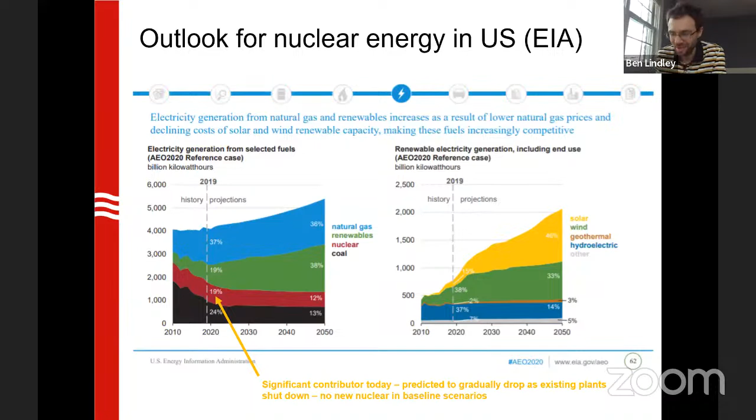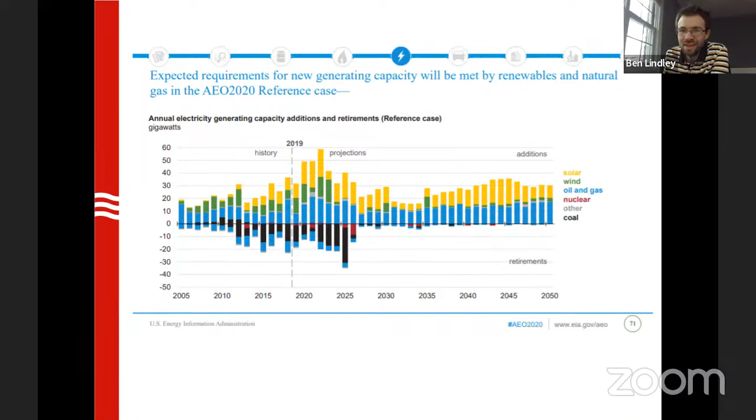One thing you need to bear in mind is that electricity is only one component of our energy use. We also use a significant amount of energy industrially, so that's industrial heat, transportation, your cars, planes, etc. And residential and commercial heating are also non-trivial.

This is important if we start caring about things like carbon dioxide emissions and also our wider energy mix, because even if we decarbonize electricity to some degree, we could end up affecting very little else. And even if we started to deploy electric vehicles at scale, that still leaves heating as well.

I should mention, I very much approach this problem as that we should decarbonize the planet, otherwise future generations are in serious trouble. And I know that's not a settled position in the US. When I ask my class this, when I give presentations in rural Wisconsin on this, I find that about half of people really care about climate change and the other half do not. I'm in the care category on climate change. I appreciate you might not be.

But the other reason for doing this, or the other reason we might care about this, is energy security. And most people can get behind the idea that we want to have energy security. That broadly means we want to generate domestic energy, and that would also mean we want to reduce reliance on fossil fuels, of which we import quite a lot.

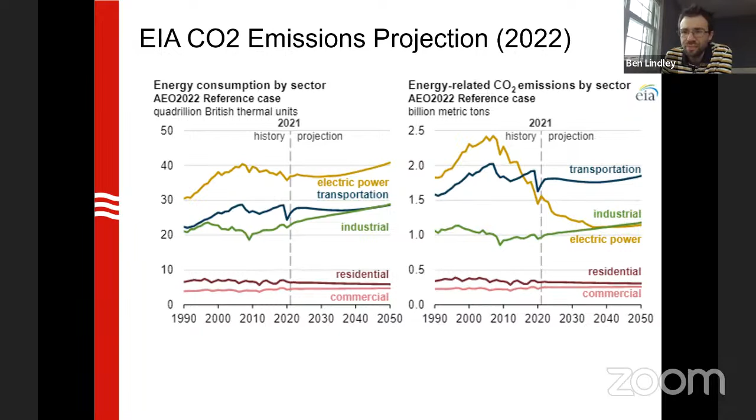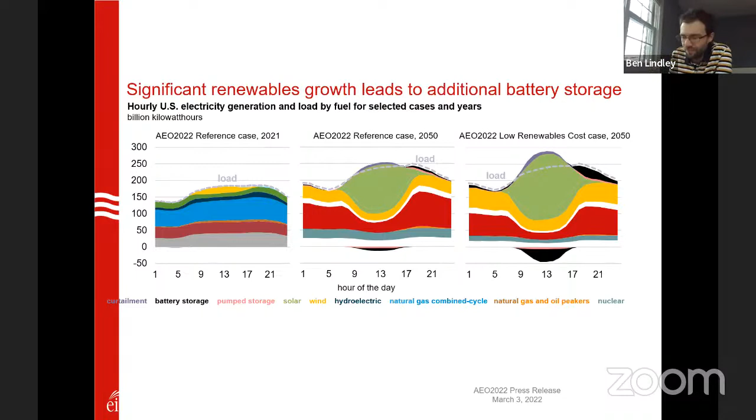That sort of dips net demand for everything else, so generators that can choose whether or not they generate drop to quite low levels. Now, later in the day, especially in places with large use of AC, solar power comes offline, AC cranks up late afternoon when it's the hottest part of the day, and you end up with this big peak in demand around 5 o'clock. I'll come on to that a bit more in a minute.

And just to summarize then, so this sort of do-nothing scenario: no changes in policy, no changes in nuclear costs, no new nuclear construction, no reductions in CO2 emissions from the United States out to 2050, little electrification of transport or heating, and continued construction of fossil fuel plants.

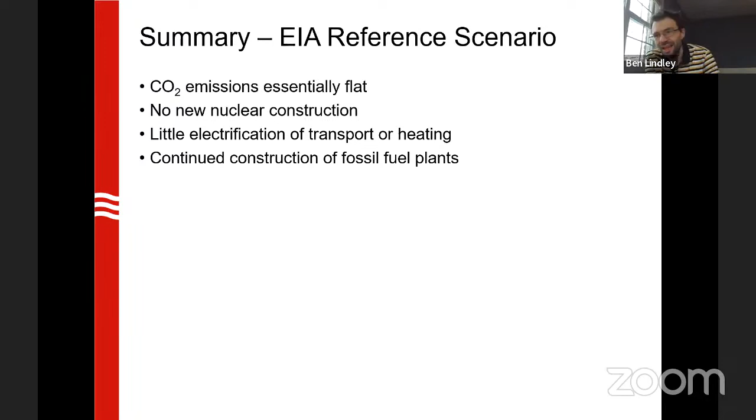And the central issue of nuclear power is capital cost. So the nuclear plants, you need to build them, then you need to pay people to staff them, and then you need to put fuel in them, and then you need to decommission them and deal with the waste.

Uranium is essentially free for all intents and purposes. Operations and maintenance is significant - you do need quite a lot of staff to run a nuclear plant, more than you need for a gas plant. That's especially true of our current reactors as they're aging - they're 30 to 40 years old in many cases. So that means you need to maintain everything.

One sort of misconception is the idea that decommissioning and disposal costs are large. Now, they are large in absolute terms - people throw numbers around like $100 billion for US management of waste. But if you look at $100 billion compared to 20% of your electricity for 60 years, it's not actually very high. On top of this, discounting effects mean it doesn't really affect the cost of new nuclear construction, because you build a new reactor, and in 70 years' time you need to decommission it. Inflation-style effects mean that cost barely makes a tick when you're trying to decide whether you build your plant.

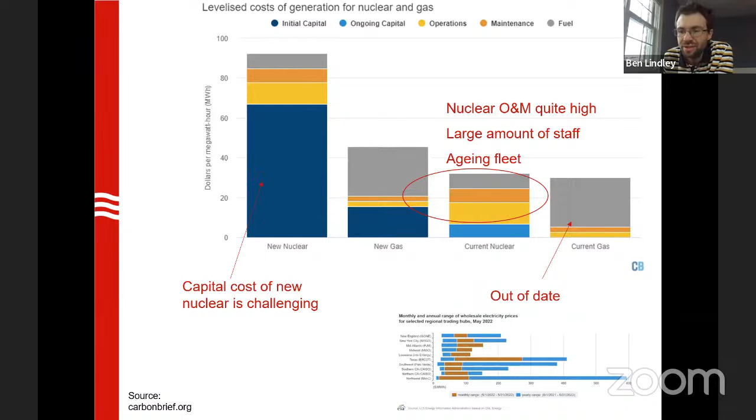That's the two bars on the right here, where current nuclear is a little bit more expensive than gas. Even though the fuel for nuclear is cheap, what it really came down to is operations and maintenance costs, which are higher than gas. So up until about a year ago, nuclear plants were being shut down in some cases for economic reasons, because even having already built the plant, they could not compete with gas, which was so cheap. The amount they couldn't compete by wasn't very high, about $12 a megawatt hour, so on the order of 20% of the cost of electricity. But that was enough to mean plants were closing.

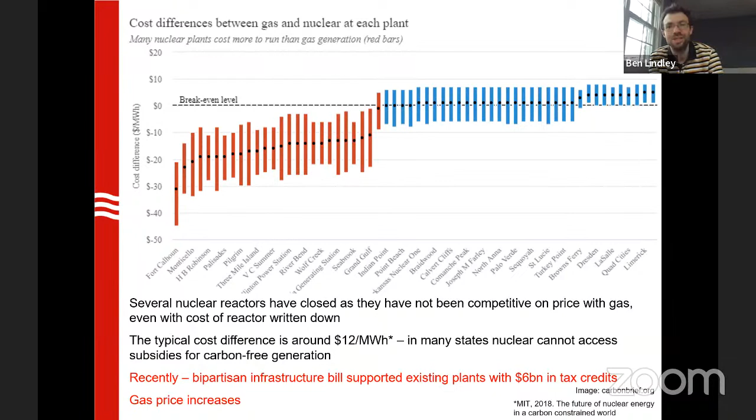Now the picture has radically changed for existing plants over the past year. First, the bipartisan infrastructure bill introduced tax credits for nuclear power, enough to bring them back to being competitive. Second, gas prices have increased. Third, people really care about energy security in light of geopolitical events. So now, for example, our local utility, Constellation Power in Illinois, is talking about how to get more power out of our reactors, not about shutting them down. Big change.

There's also been some state policies. New York, Illinois, and New Jersey in particular have subsidized nuclear power for some time, some of those based on the social cost of carbon. The picture for different states is important too. States like California, much of New England, and Minnesota have moratoriums on new construction, so there's a ban on building new nuclear plants. Minnesota's talked about lifting this ban on and off over the last few years, but to some extent it's been moot because there hasn't been much economic drive to build reactors.

Dr. Lindley? Yes, I have a question. This is Tony Praza. The question is associated with the social cost of carbon. If we look at what happens when we have a gas plant continuing to burn, it's a lot more efficient than coal and has a lot less impact environmentally. But the methane that escapes causes serious problems over the next short term, and then what changes into CO2 when you burn that natural gas, the social cost of carbon and the number of people impacted around the world as we burn fossil fuels, that sure seems like it should be a major factor taken into consideration. And it isn't, other than I think Europe is doing a little bit better job of it.

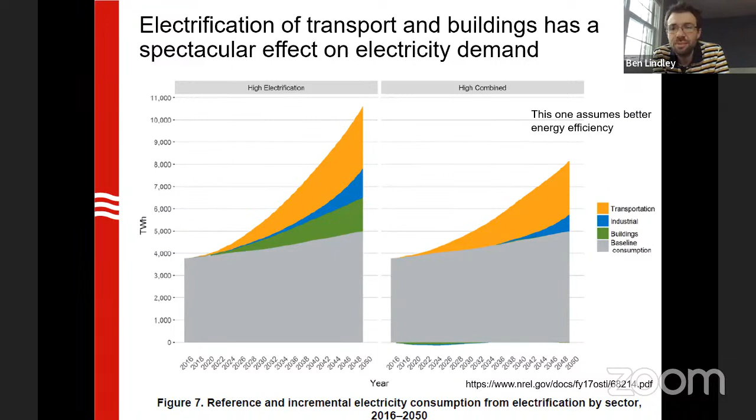So there's a couple of scenarios shown here, from the National Renewable Energy Laboratory. These studies look at how you'd get lower carbon dioxide emissions, and what those scenarios would look like. The scenarios I showed on the previous plot were these yellow dashed lines down towards the bottom of my slide, which is also fairly consistent with the carbon reduction target the Obama administration had.

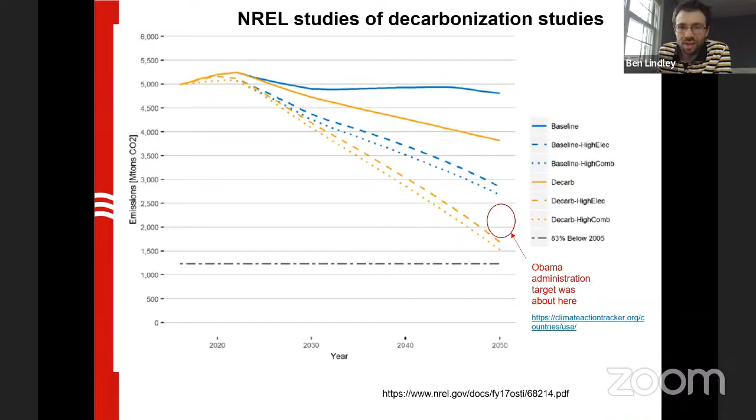Where we're going with carbon emissions at the moment in the US is flat. Various decarbonization scenarios can drive this down. In NREL's scenario, they did not consider nuclear power. They were looking at high penetration of renewables. That's their remit, that's fine.

And if they really wanted high decarbonization, the bottom of those two lines I showed, they said take out the natural gas and put in natural gas with carbon capture and storage. So for NREL's scenarios of deep decarbonization, they're saying do loads and loads of variable renewables.

To be clear, variable renewables are great. They've come down in price, they're clean, they're domestic, they're fantastic. It's about what we do with the rest of the power source. And what they have at the bottom is something coming from gas, potentially with carbon capture and storage.

Now, another way of doing this, from a think tank, gives very similar results to NREL. Where I got these bigger plots was all the variable renewables they wanted to put in. And at the bottom, this was a scenario that had an expansion of nuclear, instead of using carbon capture and storage.

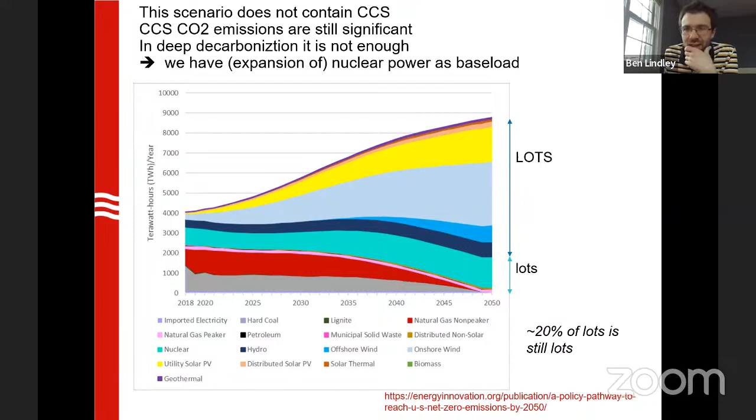That's building 100 new nuclear plants, many of them at one site maybe, but a lot. And at the moment, we're not there. The problem is cost.

This is seen as a reputable, unbiased source on costs of various electricity supplies. I think this is 2020, so it might be a tad out of date, but it's not far off. A few things I want to point out here.

Solar PV is here, so $40 a megawatt. Now, this isn't including all the generation costs. As Richard mentioned, distribution, transmission, backups, all of those issues aren't included. So this really, really cheap number for renewables gets quoted a lot, but it's not the big picture.

The big picture is shifted up by this red arrow, putting us maybe somewhere around here. That's if renewables were completely paying their way, generating power at $40 a megawatt but accounting for when and where it's generated, and the cost associated with transmission systems and so on. But it's still cheaper than new nuclear, which according to this Lazard source is all the way up here, $118 to $192 a megawatt. I'll address why that is soon.

Existing nuclear power stations are down here. Coal is here, the top end of coal being carbon capture and storage. And wind is similar to solar, with offshore wind a little higher.

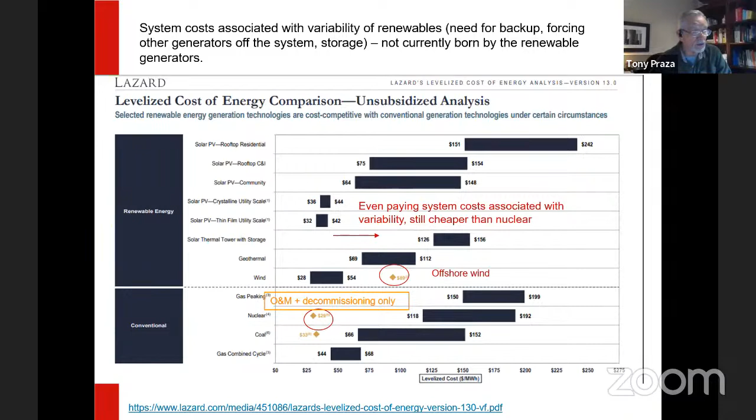Absolutely, Tony. Can I say one thing? This is Lou. But the problem with solar storage, it's not generating. It doesn't generate anything. It stores, and it does get the EIA graphs bring it in, but you got to be careful. It's not bringing really new energy in. That's all I want to say. Sorry for the interruption.

Thank you, Lou. I absolutely agree. And in terms of trying to put some numbers on these costs, there's a study here that estimates the cost. Now, I'll declare this study comes from the nuclear industry. So it comes from an organization called the Nuclear Energy Agency, which is a sort of international research agency based in Paris. So they're reputable, but of course they like nuclear power.

Having said this, what they project is that system costs might be $10 to $20 per megawatt hour, sort of at current penetrations, which is enough to shift those lines up. If you start going up to 3/4 of your electricity supply, then it becomes more like $40, $50 a megawatt hour. And so that's more than double the current cost, essentially. And if you add those system costs onto the cost of the variable renewables, then that becomes of the order of $100 a megawatt hour in, say, 2020 economics.

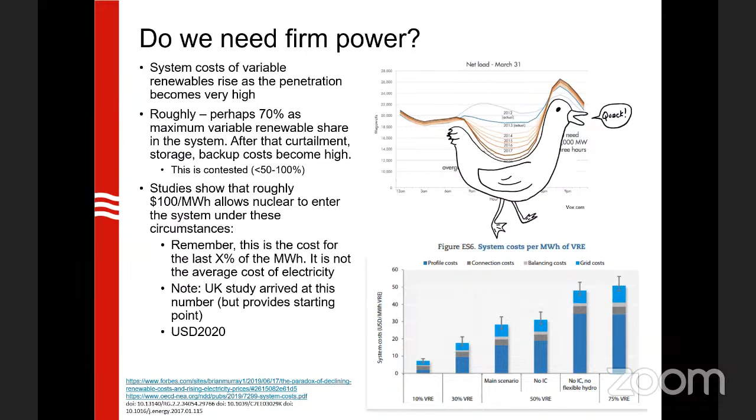So I'll comment as a sort of educated bystander. I'm not an expert on it, but I can make a couple of comments. I think some of the NREL studies suggested that demand management with, say, car batteries can help flatten demand. And I think some of the studies I'm quoting here, so these numbers like this $100 a megawatt hour, I think some of them factored in demand management into those numbers.

I guess the final big picture point I'll make is that seasonality is quite difficult to cope with this way, right? We can move demand around in the day, but moving demand between summer and winter, which is the sort of thing we start worrying about if we have lots of solar power, becomes harder. So sorry, and that's not a complete answer, but it's all I know.

I'd like to ask another question, and that is I don't see anywhere here the fact that renewables, particularly wind and solar, need to be replaced about 3 to 4 times more often than nuclear plants. And they've done some studies. A Finnish website, Thoughtscapism, using Sweden and Korea as examples, have shown that when you take the duration of the equipment into account, it doesn't look nearly as bad. Nuclear, that is, doesn't look nearly as bad compared to the other sources of energy.

So could I ask Richard on that? How do they deal with discounting effects in that? Because with all of these projects, after 20 years, discounting sort of done. But obviously, having something that lasts 3 times as long is great. There's a good argument that discount rates aren't a very sustainable way of looking at the world. But I just want to oppose it to economics.

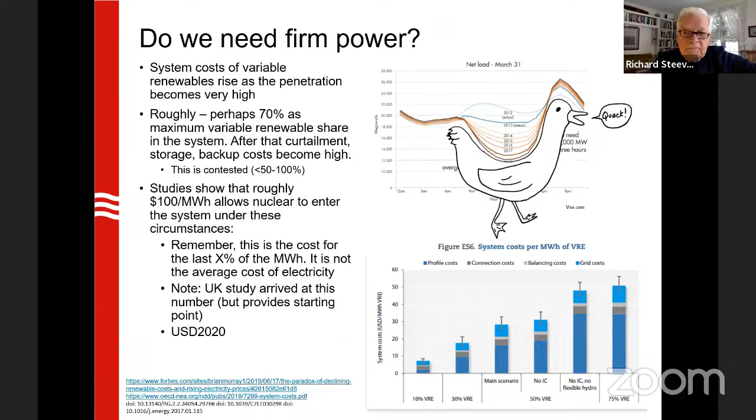Well, I'm not sure about that, but nuclear does have its decommissioning cost built in up front, whereas that has not happened with the other sources of energy. So, but I'm not sure about that. I'll send you the link to the Thoughtscapism one if you haven't seen it. I think it's worth bringing into account, but most people don't. Okay, thank you, Richard. I'd be interested to read that. That'd be great. Okay. Yeah.

Moving on from variable renewables, the question becomes what nuclear is competing with to supply the piece of the energy puzzle that isn't variable renewables.

Going back to the plot I had up a couple of slides ago, it's quite difficult for nuclear to compete with gas, at least before the Ukraine war. How the Ukraine war changes this picture, I haven't seen up-to-date data on. The problem for nuclear is gas is down here, or was pre-Ukraine. Coal is a bit more expensive, and also very bad for the environment. Once you start looking at carbon capture storage, these costs start shifting upwards.

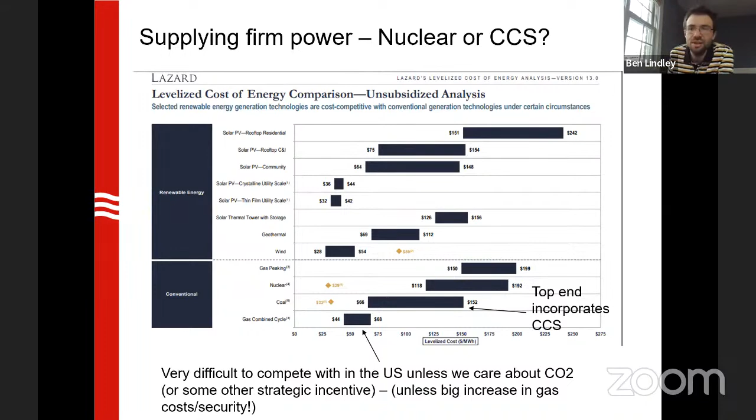So the argument for nuclear gets tied to how much we care about strategic considerations - energy storage, energy security, climate change and the environment - rather than being a straight economic thing, because in the US it is difficult to compete with gas. This isn't the case in other countries. In Europe, gas is expensive enough that nuclear, even quite expensive nuclear, can compete with gas. Here it's different. Carbon capture and storage increases the costs associated with fossil fuel generation.

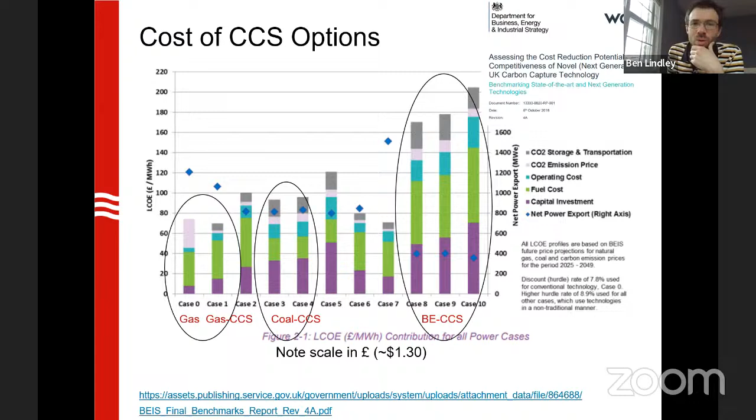We'll move on from that. Now I'm going to get to the thing you actually asked me to talk about, which is nuclear costs. I've set a number and said I want nuclear power to be under $100 a megawatt hour in 2020 money in order to be competitive.

When we think about the cost of constructing a reactor, which is the big thing we need to worry about, we think about it in dollars per kilowatt electric of the reactor capacity. I can't remember the exact number, but I think to get to $100 a megawatt hour we need to be somewhere around the $6,000 per kilowatt mark for nuclear power.

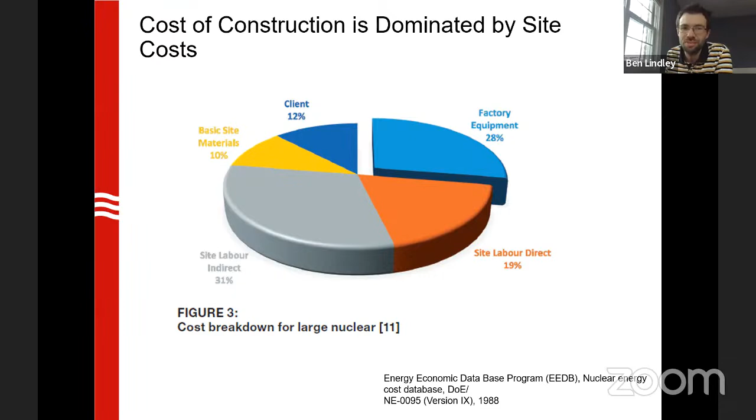Now the cost of a nuclear reactor is dominated by building the reactor. The cost of building the reactor is dominated by site labor. It is all about having people in hard hats and high-vis jackets on a site, pouring concrete, laying rebar, all of that stuff for years and years and years. It is not the cost of building things in the factory and shipping them to site - manufactured components are low. It is about doing things on site, along with interest rates and financing.

So nuclear reactors, you have to have lots and lots of site labor for a long period of time. Site labor is expensive, interest is expensive, and that is what drives the cost of these reactors.

I mentioned before that the projects have become bigger, and that's made them more complicated, so they take longer and cost more.

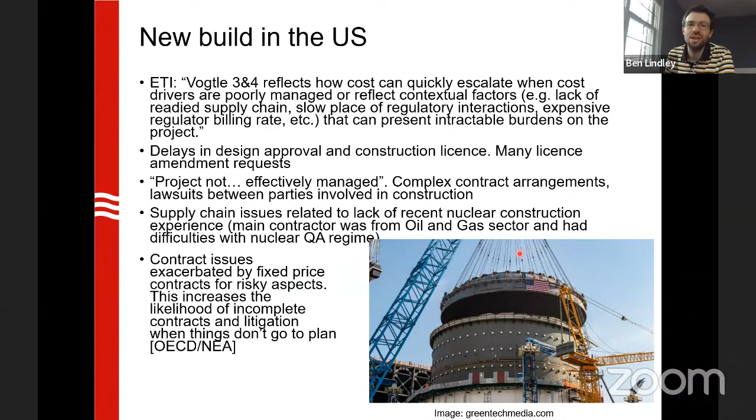Now, contrast that with what went on in Asia: you build one project, then go build the next reactor, then the next. That means the supply chain is capable of supplying all the components, and the people building the reactors are experienced, so they know how to do it properly. The same consortium and workers work on multiple projects, giving economy of scale from doing the same thing repeatedly. There was also effective management to ensure that wherever things could be made cheaper, that was learned — a focus on efficiency and savings.

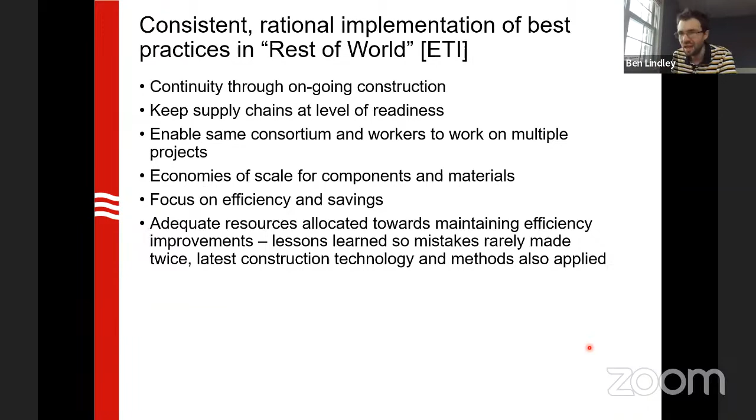One of the big factors — and this may sound silly — was how complete the design of a reactor was before they started building it. On this chart, the x-axis shows how complete the design was at the start of construction, and the y-axis shows how much the reactor cost to build.

This clump here is the Asian reactors from Japan, Korea, China, and the UAE. This one is Vogtle — the reactor they started building in the US — they had completed only 30% of the design when they started building it. The reason for that is you don't finish designing the plant until there's a decision to invest in the site, because designing the plant is expensive. So you get an investment decision — right, we want to build this — and then the decision is taken to get it up and running in eight years.

So that means construction needs to start next year, and they'll build the bits they know how to do, designing the rest later. This was disastrous because things changed — they didn't have a complete design. The regulator made them redo things; they'd start building on site, find it didn't work, and have to rework it. That meant everything became expensive.

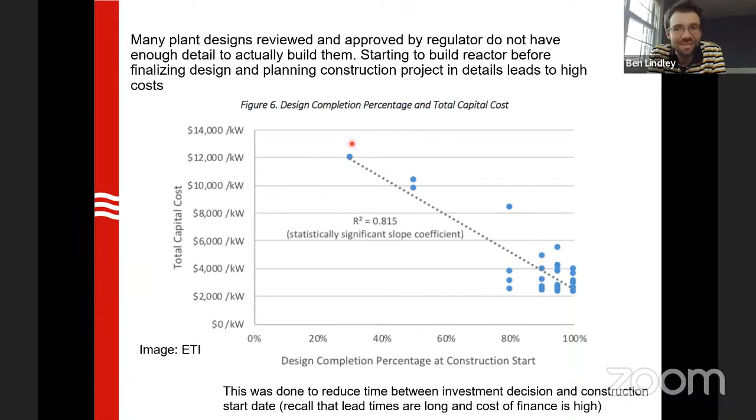However, this one, Vogtle, is what we call a Gen 3 plus reactor, which means it's got even more passive safety. So it's a slightly more passive, advanced design than some of the domestic Chinese designs, for example. One factor, though, that's quite telling is - where did I get this...

These reactors built in France and Finland are French-designed reactors. This one is an American-designed reactor called an AP1000. These two French reactors are called EPR. EPRs and AP1000s have been built in China at competitive costs - the same fundamental design was taken to China for both of these, and the cost was a lot lower than when it was done in the US.

Sorry, that was a very long answer to your question. I hope that covered it. Yes, it did. Yeah, thanks.

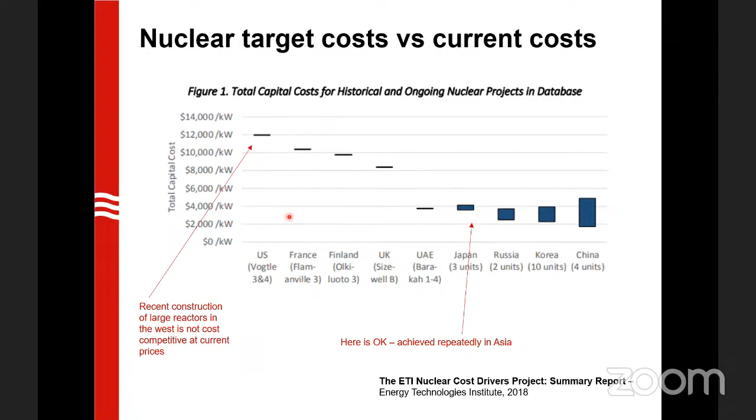The way we're going with this in the US, and to a lesser extent Europe. The difference between the US and Europe is that in the US, the energy system is not the responsibility of the federal government, it's the responsibility of state governments, and most things are privatized. This means utilities are small and things have to be broadly privately funded, although with some government support.

In Europe, the picture's a bit more blended. The state will directly finance reactors. In France and Britain, the state can come along and say these big reactors are getting too big for the private sector, we will do it, or we will work with you.

But both in Europe and the US, there's a move towards smaller reactors. The idea is to go down from like 1.5 gigawatt electric to something between 50 and 400 megawatt electric. This reduces the costs and makes the project easier to finance. If you have a smaller reactor, it takes less money to build, so you can build it without betting the company on it. The idea is to get these things down to like $1 billion or so.

The second thing to do is try and get the unit cost acceptable, and two principles are used here. One is modularity, where you build the reactor like a nuclear flat pack, with a whole load of components built in a factory. We're good at building things in factories—they're efficient, costs stay down, productivity is high, and we're not paying for workers to relocate to some site 1,000 miles from their family. We can optimize in factories, then ship everything to site and just assemble it.

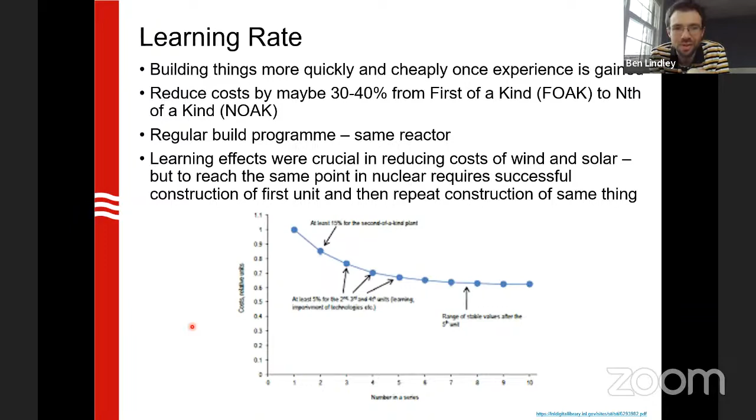You can do these things with large reactors, and if done well, large reactors can be cost effective. In the West, this requires a lot of state intervention, and even in Europe we don't really have the level of state intervention to do this effectively. It's not build one reactor, it's build 10 reactors—building 10 large reactors is $100 billion, and no one in the West can finance that, including Europe. So the logic is: make your reactor small, then I can finance it, then I can build lots of them, and then it can be competitive.

For either of these approaches, we can hit target costs in the sort of $80 to $100 per megawatt hour region, which according to the target numbers I put up earlier is well within where I think a nuclear program can get and be cost effective.

The leading example of this in America is called NuScale—a reactor developer headquartered in Oregon. They're interesting to us Wisconsinites because they signed an MOU with Dairyland Power to evaluate the potential of their technology in Wisconsin. The idea is they'll build up to 20 factory-built reactors, stick them on a truck, build something that looks like a big swimming pool at the other end, and put those reactors in the swimming pool.

Their stated target cost was $65 a megawatt hour in 2020 USD. It will have gone up since then because commodity prices have gone up, and the cost of everything's gone up. Notably, this is even less than the figure I had on the previous slide—I said 80 to 100, they're saying we can do it for 65.

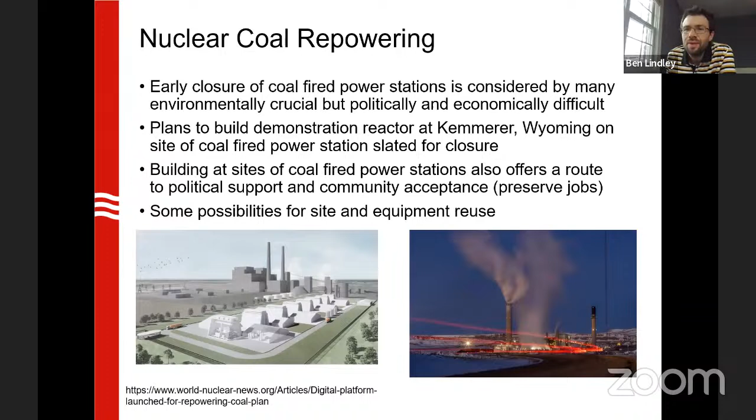There's a pilot plan for this at a site called Kemmerer in Wyoming, a coal-fired power station that's due to close. The plan would be to take one of these new advanced nuclear reactor designs and put it on the same site. I think they're working with local stakeholders in Wyoming to try and make this happen, and there's a degree of positivity behind it.

Another area is process heat from nuclear power. I mentioned way back that most of our energy use is not electricity. One route to decarbonizing non-electricity production is electrification. This is probably the route we're going down with electric cars one way or another—it might take 50 years, but that's probably where we're heading. With industrial heat, which is a major user of energy, it's quite difficult to decarbonize efficiently.

We could produce electricity and then use an induction heater, but that's really inefficient, so it would be expensive. Nuclear plants produce heat directly. We normally convert that heat to electricity using a turbine, but we don't have to—we could use that heat directly to heat industrial processes if we co-site a nuclear reactor with an industrial facility. This gets a bit easier if the nuclear plant doesn't have big exclusion zones or evacuation zones around it.

Some of this depends on the temperature of heat needed, and that varies. At one end, cement manufacture takes 1500 degrees C, which is very challenging to produce from a materials perspective. The only reason we can do it in cement manufacture is we have a big furnace surrounded by ceramic bricks that can cope with that heat. It's difficult to move heat around at that temperature.

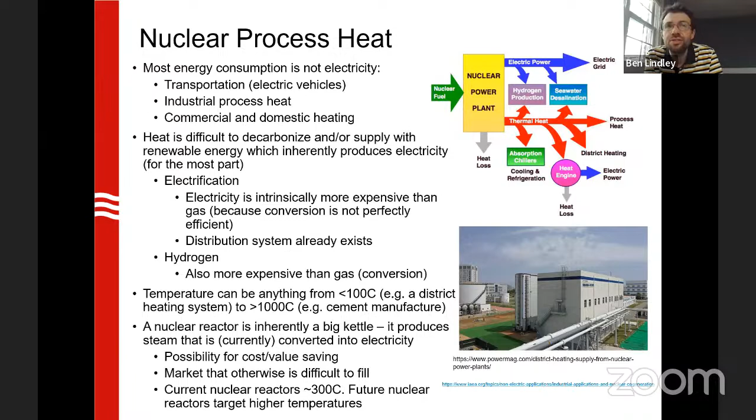Yeah, absolutely, Lou. There's sort of two ways to address that. One comes back to my emergency planning zone slide—could you, if we were talking about a reactor that was 50 megawatt thermal rather than 3,000 megawatt thermal, which is the current ones, and it had no emergency planning zone around it, put them near a town? That's an open question. Frankly, I'm not convinced we could in Madison. Urbana-Champaign in Illinois, their university campus is thinking quite seriously about trying to put a very small reactor on their campus to demonstrate this. So I think it depends on the site, but that's one way.

The other way is you can transport heat rather a long way. As I mentioned, the Finns seriously considered taking a nuclear plant that's 80 kilometers from Helsinki and piping the heat 80 kilometers. With advanced district heating systems, that only gets easier, because they use hot water rather than steam, with better efficiencies and lower temperatures. I don't have a good US example off the top of my head, but I had a student looking at this who came back and said he thought Toronto was actually a pretty good case, because they have a district heating system and something enormous like 12 nuclear reactors that are about 50 kilometers from Toronto. So it's one case—you don't necessarily need to build it right in the town, you build it 20 kilometers away and bring the heat in.

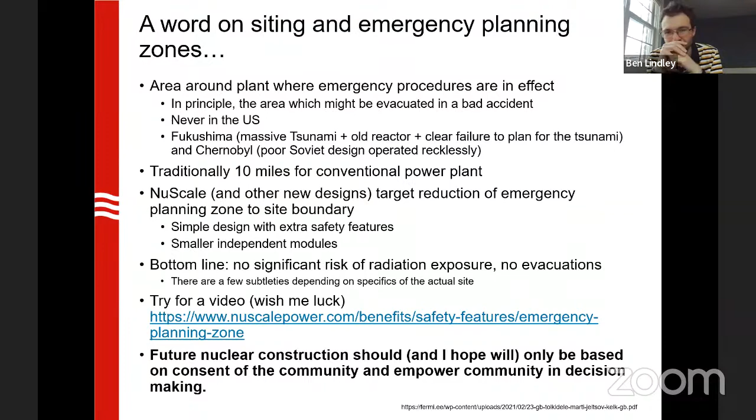One of the things we've seen at UW is declining enrollment in our nuclear engineering program, and we're not quite sure why. It's replicated across the country as well. I'm not sure of all the reasons, but I've been asking the freshmen this last week, and I think it's a mix of people seeing closures in nuclear plants and thinking, oh, what would that mean for a career? People thinking the only job a nuclear engineer does is go work at a nuclear plant. And one of the students in our freshman year said his parents were worried he'd get cancer from the nuclear stuff.

I think you already have a solution—you've got Miss America as one of your students now. Yes, I'm really hoping that Grace Stanke goes and solves this problem for us by drumming up a whole load of new undergrads, by spreading the good word of nuclear energy.

But a few things to mention here: what I see is companies and labs knocking down our door asking where all the nuclear engineers are, because they need to hire them. There's strong R&D in nuclear engineering in the national lab system—places like Argonne Lab in Chicago, Idaho Lab in Idaho, Oak Ridge in Tennessee, and many more. There's California, Albuquerque, all hiring new nuclear engineers. There's also a lot of startups at the moment trying to build advanced new designs of reactor, including three fusion startups in Wisconsin. UW-Madison is a big career place for this. Nuclear plants are hiring following federal support—they need more people. And nuclear engineers don't have to do nuclear; employers love engineers because of the combination of being able to do quantitative work and understanding that time and budgets matter and the real world is important. So it's a great career option as well.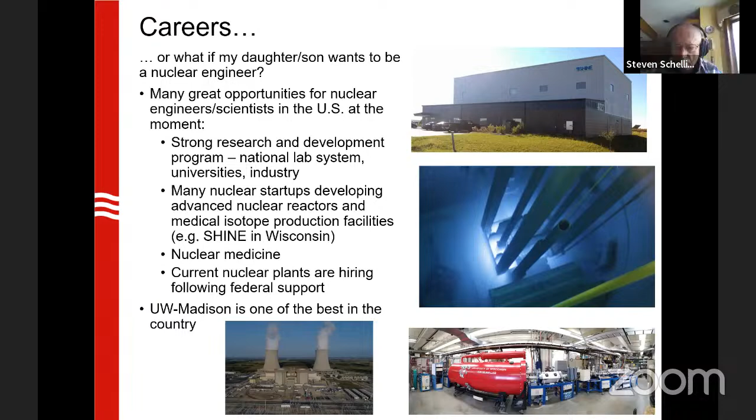I have some conclusions.

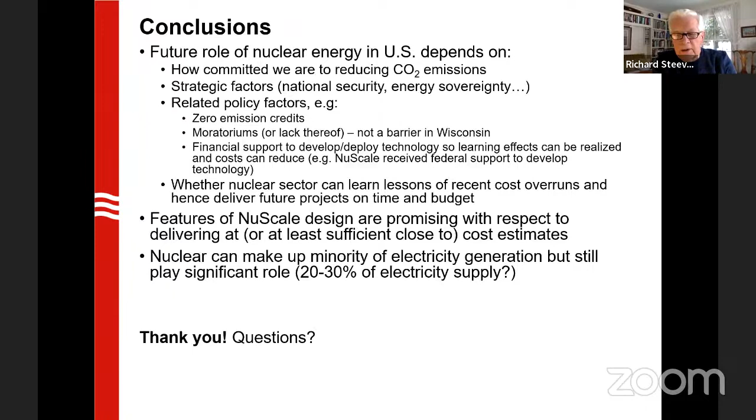I've got a quick question. I know there's some others holding out here, but since we're on the subject of Great Britain for a moment, do you have any comments to make on Rolls-Royce? I know that most of your work has been done in England with large consortiums, the European Power Reactor and such, but Rolls-Royce has an intriguing looking design for a small modular reactor. Have you some thoughts about that?

Yeah, absolutely. I worked on that design in the UK. Back when Rolls-Royce were first coming up with their small modular reactor, I was the person telling them what the core should look like, along with some of my colleagues. So that was good fun. In fact, I'd probably say that's the thing I enjoyed most in my career to date. It was really good.

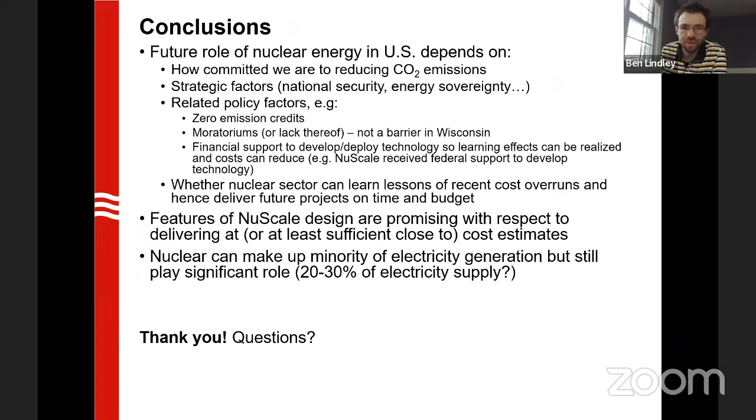I think Rolls-Royce are doing a lot correct with how they want to design a reactor. So I showed NuScale, and I'll pull up what NuScale had again. NuScale, put a reactor on a truck, send it to site. Great, fantastic, brings your costs down. And then they went and built this massive concrete swimming pool around it. Now, don't tell NuScale I said this, because NuScale is great, but the swimming pool's a problem, right? One of the big expenses of nuclear reactors is aircraft crash prevention, making sure that if someone crashes a jumbo jet into it, you don't release radioactive material, and that's expensive. The thing that stops aircraft crash prevention in this thing is this massive swimming pool around it. You can't see the whole thing.

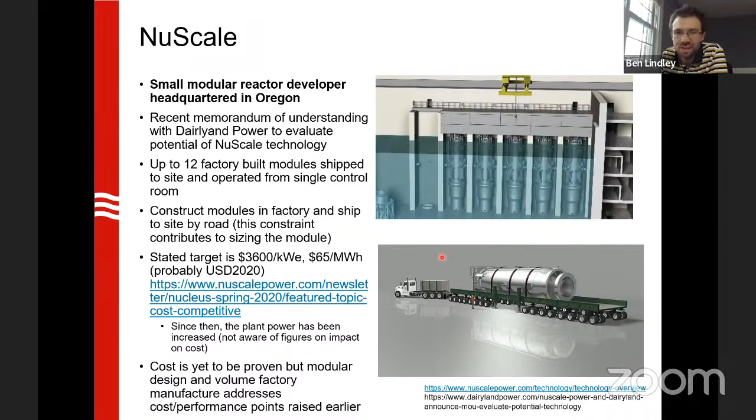Looking at it without knowing NuScale's cost numbers, the cost of that civil engineering structure could be expensive. What Rolls-Royce have done is they've got a reactor that's bigger than one of these NuScale modules in terms of power output, but a similar physical size. So when I said 50 to 400 megawatts, right here, NuScale, each one of their modules is about 70 megawatt electric. Rolls-Royce are at the top end of this.

For me, from what I've seen, that is the place that could give you the best overall cost benefit. Rolls-Royce have done nothing, or very little, that's innovative with the technology itself. What they've done in terms of the fuel or the system design, what they've done is really go after some of these things on costs. They thought about, let's make everything in factories, let's make it road transportable, let's think about how we build it on site to make sure we can build it day or night. For me, that's an interesting project, and I hope they succeed, because I think they're going about it in some of the right ways.

Thank you for that great question, great answer. I have another quickie follow-up, if I may. I'd like to know your opinion of Copenhagen Atomics. They're very keen on thorium reactors. They're now talking about a waste burner. They seem to have raised, I think it's 20 million euros fairly recently, and looking for more. Any thoughts on that approach? Do you find it off the wall? Do you find it intelligent and optimistic? What are your basic thoughts?

So I'd approach that from a couple of angles. One is the molten salt reactor that Copenhagen Atomics is working on, and the other one is Copenhagen Atomics themselves. I don't know Copenhagen Atomics that well. They're quite a small company, and that's always difficult to go from there to building a reactor. However, the way they're going about it is also really sensible. They're using a molten salt reactor technology.

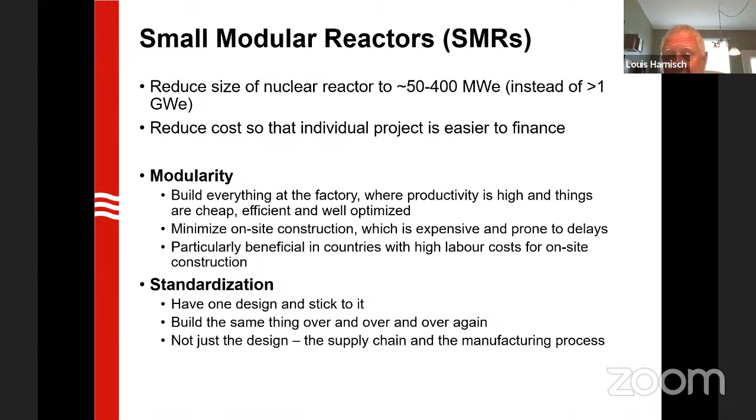How does South Korea build these big ships so efficiently, and in the US we can't do that? Management is a huge deal. Absolutely. They're trying to build a high-speed rail link from London to Birmingham in the UK. They've spent several billion on it, and they haven't gone out of London yet. It's a disease that afflicts mega projects everywhere in the West. They're very difficult to deliver, and all the nuclear safety requirements exacerbate it for sure. But the fundamental issue is large construction projects.

Lou, I could also speak to your question on the Gen 4 SMRs, such as Oklo, if you like. Yes. Overall, I think there's a lot of good stuff there. Generation 4 reactors, as a general banner, covers anything that doesn't have water as a coolant. At the moment, nuclear reactors are basically giant kettles. They have water in them, and you move that water around the circuit to power a turbine.

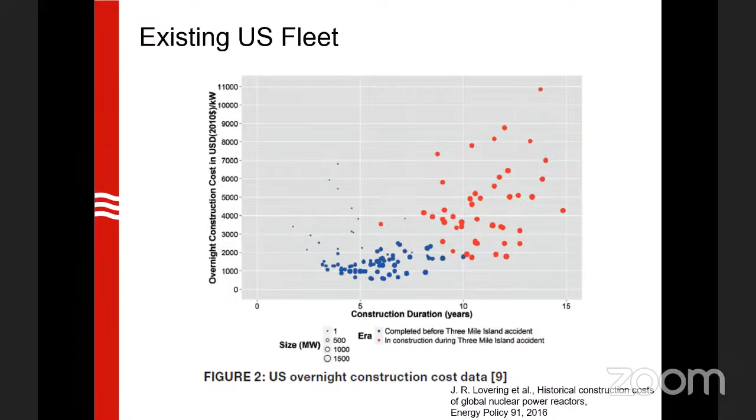Doug, go ahead. Yeah, so I was just going to comment on the Nuclear Regulatory Commission. You were talking about its politicization, and I just wanted to say, I looked at this while you were talking, and they actually have 5-year overlapping appointments, so they expire one year after another. So a president hanging around for 8 years will obviously be able to completely reassemble that commission. But just like in Wisconsin with the Public Service Commission, previous appointments actually somewhat stabilize the policy that's expressed by the commission. So there's something that addresses at least part of the issue I think you raised, and I just wanted to make sure everybody knew that.

Thank you, Ed. Doug, thank you very much. Thank you, Doug. Yeah, this is Tony, can I ask a question again? Yes, Tony.

With the molten salt discussion we had here recently, as far as fourth generation or using metal, whichever, the concept of possibly having one of those put by one of the plants that have our spent fuels, that particular plant might be deactivated — it sure seems like that might be a way of using up those spent fuels and not moving them across the country. Is anybody working on that?

So firstly, yes Tony, I absolutely agree with you, this is a good thing to do with spent fuel. One thing that could be done is to reprocess it, which is a chemical separation process, creating new fuel which contains the long-lived parts of the old fuel, and use it as fuel in these reactors. Molten salt and liquid metal cooled reactors have an added advantage to do with the physics of how neutrons behave in those conditions. That means they can effectively create new fuel from the old fuel and drastically improve the utilization of uranium in the reactors. So it solves two problems: firstly it reduces the amount of waste we need to store, which is a major issue because there isn't an agreed place to put it, and secondly it allows us to use much less uranium.

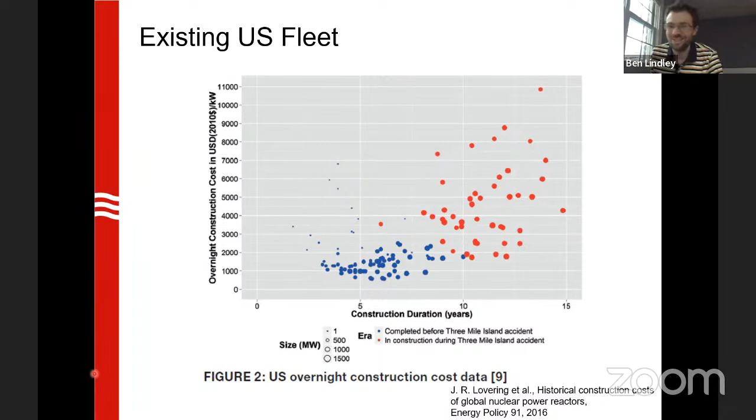And if you're ever in town, Stephen, let me know - we're a tough crew. Stephen was one of the first graduates from your department. I was the first graduate. The first - there you go. Can't remember, thank you for the correction.

And I should note that Max Carbon was on the NRC board at one point in time when they still had people with physical engineering and physics knowledge on the NRC board. Good. It's all political appointments now. Yeah.